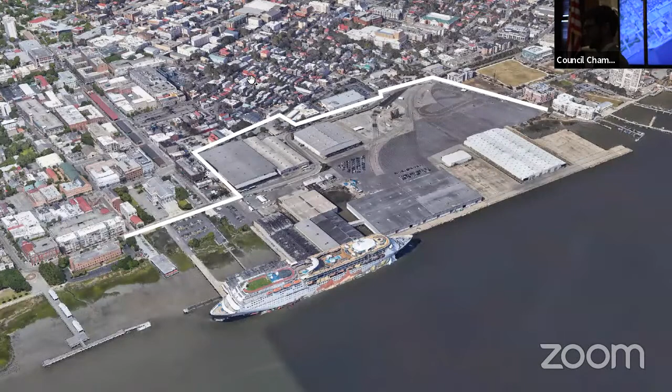If I could just get a cursor to click on that slide so I can control it, I think that will be good to go. You all know the site today. I assume everyone in this room knows where Union Pier is, so I think we're through that phase of the project and can move on.

So, the site today and the current master plan proposal. This is what we will be submitting to the technical review committee soon. This is the aerial rendering of what is proposed, and another view from the north shows the existing site and what is currently proposed.

The key thing I want to point out, as a refresher for those who may not have seen it, is that we have met with the community, we continue to meet with interest groups, and we continue to listen. We've made a major change in the overall master plan, eliminating buildings in the corridor where the rice mill is and replacing it with park space. There is now a grand mall that connects the rice mill to the waterfront, coming all the way through the site, connecting to the island park.

So just to refresh everyone's memory, this is our current operating master plan, the one we will be submitting to the technical review committee for consideration soon. In regards to this presentation, these are the four things we'll be talking about.

First and foremost, the planning process, how we have arrived at the current ideas; the intent of the transportation design; the program and its effects, meaning all the things proposed to be built at Union Pier and what they do; and fourth, a review of all the opportunities unlocked through this redevelopment. So with that said, let's jump right in.

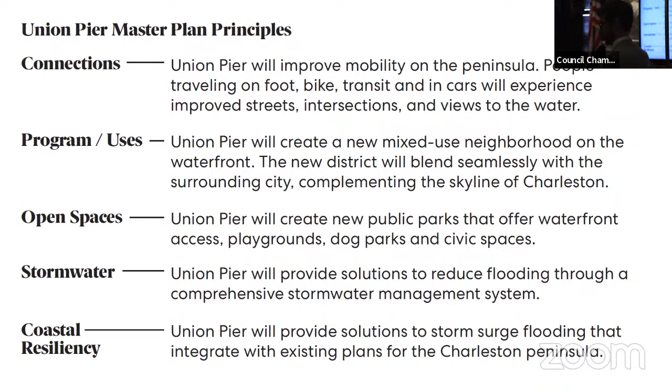The very top one is about connections, and that's really what we're here to discuss today: the potential for Union Pier to improve mobility on the peninsula, so that people traveling on foot, on bike, transit, and in cars will experience improved streets, intersections, and views to the water. That has been one of our goals from day one and continues to remain one of our goals, along with all the other things which we're not going to dig into.

This is the current proposed master plan from the air. This is the same thing you saw in the earlier watercolor, and you can notice the large green space in the middle around the rice mill, which is the most recent change. As you know, over the course of this presentation, some slides will be horizontal, some will be vertical. You can always use the Harris Teeter to orient yourself, or the Fleet Landing restaurant, or of course the Wharfside to the north.

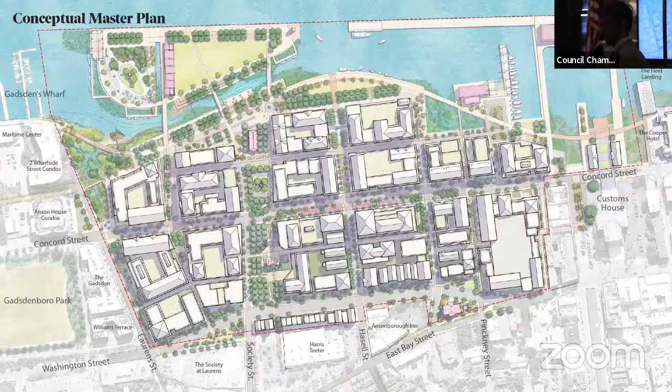In this master plan, what you see is a grid of streets. You see new development opportunities. You see the new waterfront rebuilt. And I want to point out a key point as we begin.

Inherent in the discussion of converting Union Pier from a port into something else is the idea that there must be agreement, concurrence around the goals of this conversion. That means agreement among many stakeholders and agencies, including the future owner, the current owner, local government, state government, the rail operator, other adjacent property owners, and coastal permitting agencies. This is a major project with many implications, and that interagency coordination is so important here.

In this map, you see the ownership of different streets in and around Union Pier. Obviously, they're different colors. The state owns many of the roadways, and the city owns many of the roadways as well. It's a fragmented ownership around the site.

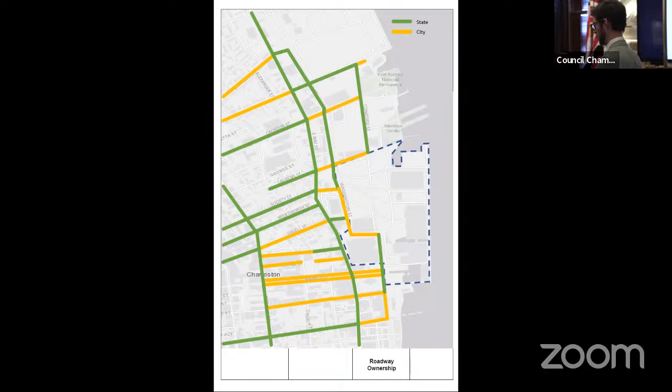Our request, what's going to be and has been written into the PUD, is a request for city ownership of all the streets on Union Pier. We believe the city is the best owner, and we will provide a revenue stream to maintain those streets. We want to move the ownership of these streets out of the state and into the city so that we can design them the way they should be designed.

So that's the planning process we've gone through, and that's the ownership scenario in terms of streets, city ownership, and public spaces too, which I didn't mention.

Now we'll talk about the intent of the transportation design. What do we intend to do? And I'm going to just grab my phone so I can watch our time. I'm watching, I got it.

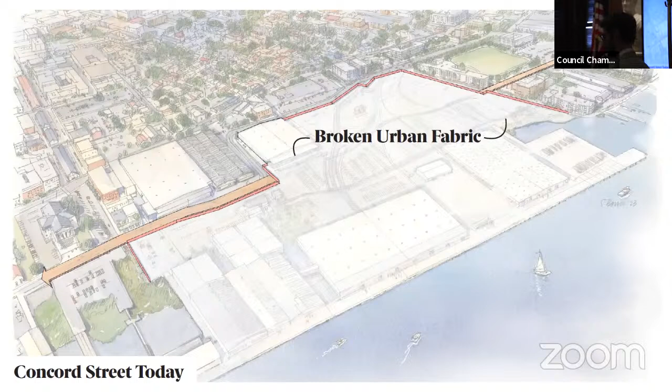This broken urban fabric that's illustrated here is the thing that Union Pier can solve. It can provide opportunities to improve that broken urban fabric and provide for new connections. This is the plan that realizes that, but this is what it looks like from an analytical standpoint. I'm going to return to this diagram because it's the most important aspect of my presentation today, and Jennifer's as well.

Unlike many other developments built or proposed on the peninsula, Union Pier has the ability to add new routes to the network that will help distribute traffic. It will improve intersections all at its perimeter. Consider recent real estate developments downtown that add no new streets, don't improve intersections, and have no mobility enhancements, just loading the grid with more. Union Pier has the chance to expand the grid for people in cars, on bikes, on foot, and in transit. That is the power of this proposal, but it can only be realized if this redevelopment takes place.

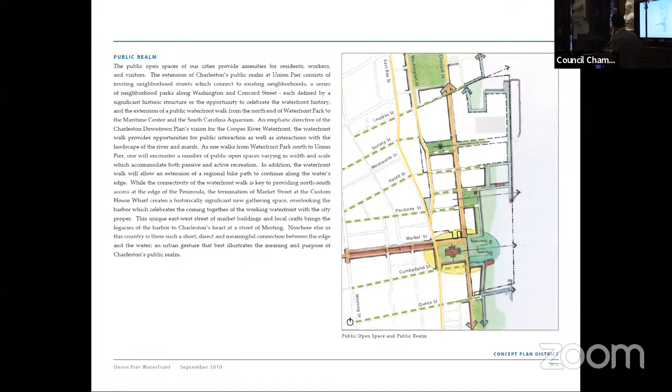These ideas go way back. I've been told there are even plans from the 70s that talk about improving the Washington East Bay corridor, though I haven't seen this. This, of course, is in the Calhoun Street plan by Chan Krieger done around 2005 or 2006. The Century 5 plan includes the 2010 plan for the reuse of Union Pier, even back to the 1996 plan for Union Pier, all suggesting changes to the corridors of East Bay and Washington. They keep coming back because it's a good idea, and we continue to study it. We think it's something that needs to be pursued and done.

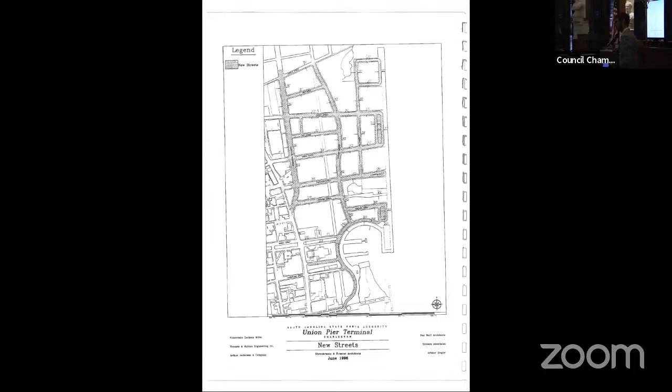This is how this can work. We're going to show you the design options we've looked at, and the one we think is most feasible.

So again, we're oriented 90 degrees here. You can see the East Bay corridor snaking its way through. If you live in Charleston and you've driven on East Bay Street, you know the segment from Calhoun to Market is substandard in many ways. The lanes are too narrow, the geometries are irregular, there's no space for bikes, the sidewalks are too narrow, the intersections are challenging. It's just difficult to navigate.

Our goal is to create a slow speed, high volume network on and off site, with improved efficiency that can help move everyone through the grid. One way to achieve that is by increasing the facilities on Washington Street and enhancing it so that Washington and East Bay begin to function as a coordinated pair. That's what's been described in all of these subsequent plans for maybe 50 years, and that's what we've looked at.

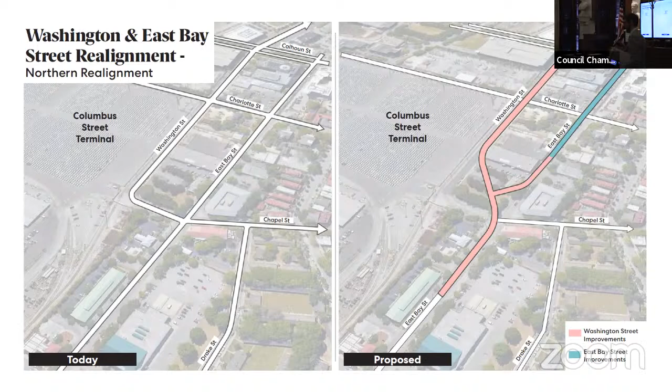That's right. There's the cut through the gas station, which I'm sure the bank and the gas station just love, the fact that there's that little road there.

This can be enhanced, this can be improved. But this northern intersection can only happen if the southern part happens. Why is the southern intersection only possible with the redevelopment of Union Pier? The answer is that the diversion of Washington Street, and I'll show you some drawings on that in just a second, goes through the warehouses currently on the Union Pier site. So this network arrangement only comes into play when Union Pier itself converts from a port to another use — the warehouses have to be demolished. That's probably why this has never been fully realized.

So with that said, these are the alternatives we've looked at. The historical proposal puts 4 lanes on Washington and 2 on East Bay. As we've studied this further, we believe this has significant right-of-way width constraints — there's not enough street width to get everything through. So this option is constrained in a way that makes it significantly less feasible than this design, which is a 3 and 3. What this does is shift volume off of East Bay, away from Ansonborough and onto Washington, accomplishing the network goal of the original proposal from 40 years ago.

But it does it in a way that is the most feasible, because you don't run up against roads that are too narrow. So this can work, we believe. This is our recommended and preferred option, simply because we believe it's the most feasible.

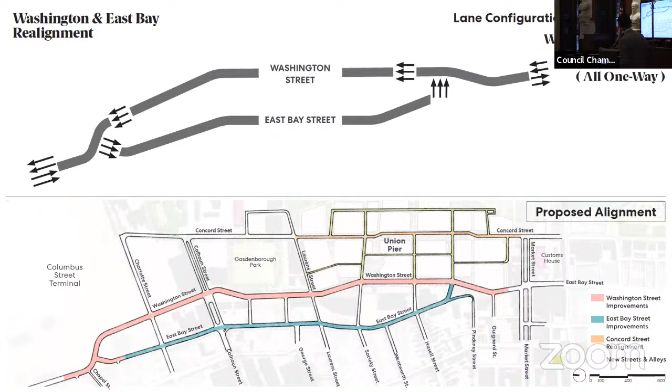So what do those details look like and how do you accomplish an improvement of these networks over time? I don't know, Jennifer, do you want to go through these or do you want me to just roll through them? What do you prefer? Okay, if I say something wrong, yell at me. Okay, I'm just going to read from the slides, which seems like the easiest thing.

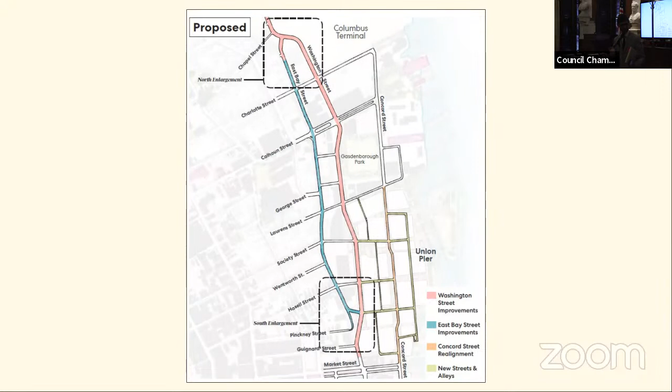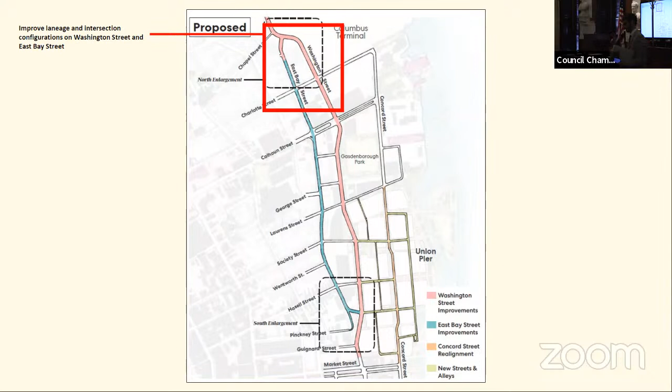So how do we do this? First thing is to improve the laneage and intersection configurations on Washington and East Bay. The second thing is to improve Washington at Calhoun, that intersection, and to shift traffic flow to Washington. The Washington-Calhoun left-hand movement northbound, as you all know, is a challenging one. This network design can help to change that and improve it if it's done the right way.

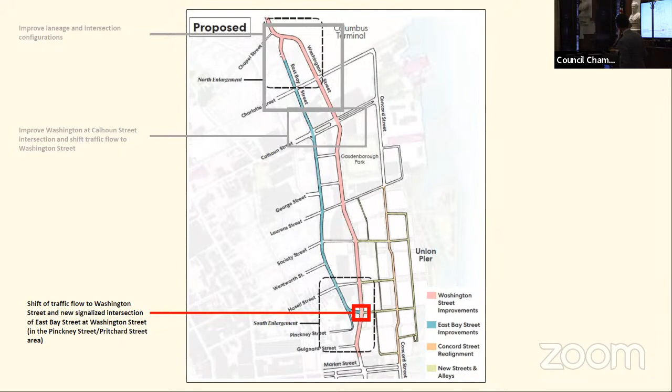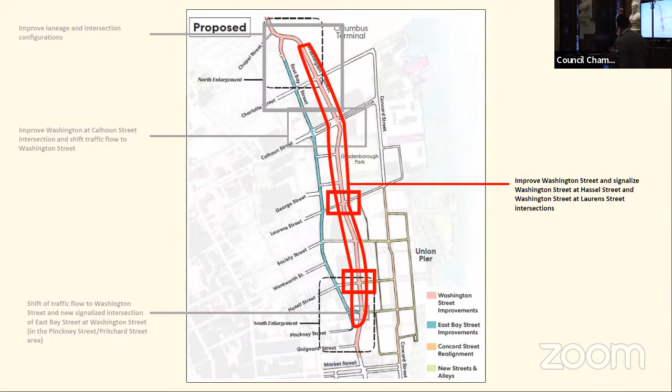At the southern end of the site, again at Union Pier, shift traffic flow to Washington with a new signalized intersection of East Bay at Washington in the Pinckney-Pritchard Street area. Then all along the Washington Street corridor, improve the street, signalize it at Hassel and Washington at Laurens. And then improve, finally, the intersection all the way to the north at Charlotte.

This is at the aquarium in Charlotte Park. There's just a turn in the street there. That intersection has some visibility challenges, and Jennifer could elaborate on those. That also needs improvement. These are the offsite improvements that need to occur to realize this vision that the city has had in so many plans for so many years. This again requires interagency coordination and a commitment, but it's not possible without Union Pier's property.

Come on up, come on up.

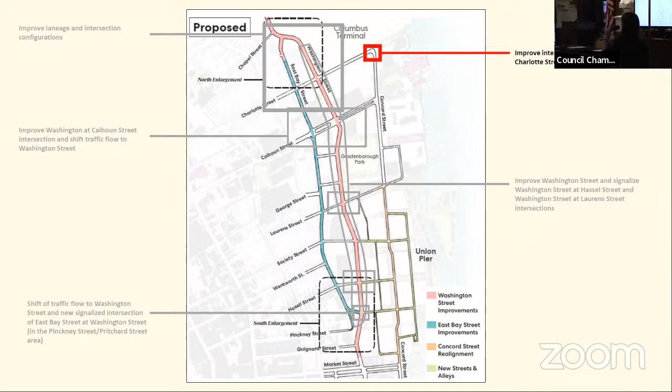Just as a reminder, we're looking at the vehicular improvements, like what do we need to do to get the cars to where they need to be? There's a whole set of pedestrian and bicycle improvements and transit improvements that are on. So just remember, Jake's kind of stepping through this way, but these are the ones that we're working on, top to bottom.

If anybody's been to the Charlotte or Concord at Charlotte intersection, you know that's just not a real intersection today, it's kind of a turn. There will be increased volume even with the current plans for that section of Concord. So just get that cleaned up and make it more efficient. We're looking for how to not only help with the lane widths and make the streets a little bit bigger, but be able to handle more capacity and efficiency, and really get the most we can out of the lanes that we have and the intersections.

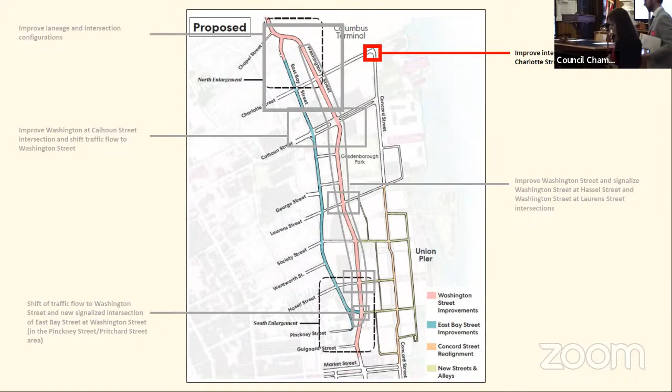So I'll move along, we'll come back. Keep going. What could this look like? These are some sketches that show how these concepts may work on the southern end.

East Bay and Pinckney Street, so that's correct. This is East Bay Pinckney. Market Street in this image is behind you, it's to your back. So in the future, Washington Street diverges and it goes again through the warehouses that currently exist.

Can I ask you a question about that? Can you go back to that picture? Is the effective zero lot line of the Union Pier PUD and development Washington Street? Is that the zero lot line?

Help me understand what you mean by the zero lot—the edge of the distinction between Union Pier on and Union Pier off? That's correct. To the right, on the other side of the purple line, that's Union Pier. And today, where the van is parked, that's Union Pier—that's on port property.

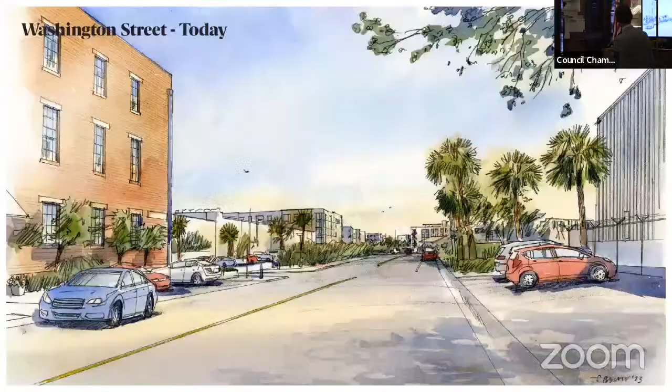So yes, that's correct. And then when you're on Washington Street, what does Washington Street look like? This is today's Washington Street, with the Ansonborough Inn on the left. What's envisioned is a beautiful street in keeping with Charleston's character—3-story buildings, row house type design on the left. This kind of reconfiguration is what we think can be enabled.

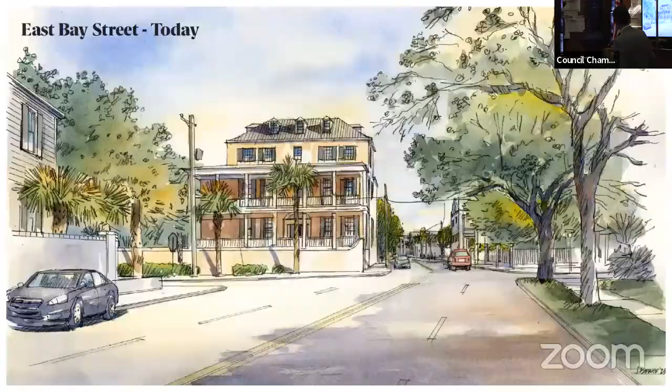What does East Bay Street look like? By shifting volume away—and again, we have to make sure we've proved it out, I've got to make sure it works—3 lanes here and bike facilities on East Bay, because this segment of East Bay does lose a lane in their current preferred option. So you're losing one vehicular lane through the entire corridor.

Next, the cycling network. First and foremost, we need a meeting with my friend Mrs. Zimmerman and Charleston Moves. I want you to know we've read every letter you've written. We understand there are needs that can be met here, and we want to get together with you as soon as we can. After the meeting, let's talk, because it's important we understand all of your viewpoints and perspectives. I also want to say, as a lifelong cyclist myself, you all know that's a cause we're dedicated to. I want to walk you through our current thinking.

On Union Pier, the proposal is for narrow, slow speed streets made for the integration of walking, cycling, and vehicles all at once. We are not proposing high speed streets that need separated, dedicated infrastructure. That's not in the design proposal here, with the exception of course of East Bay Street.

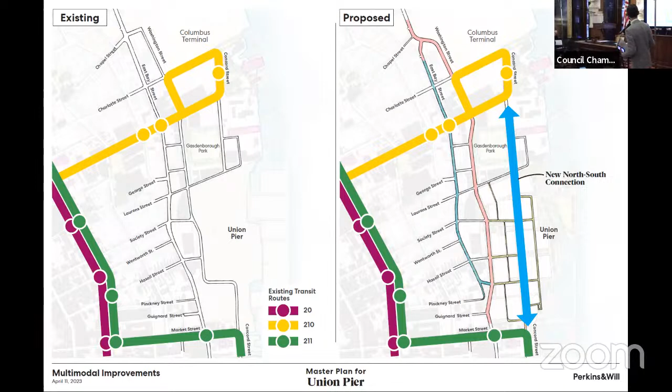And the final thing, the whole grid built out, is the pedestrian network. This is, in many ways, for me at least, the most compelling aspect of Union Pier.

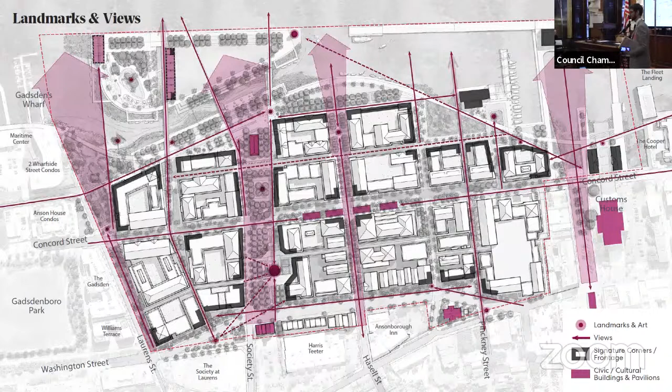We really think the pedestrian opportunities here are incredible. And I'll conclude on these slides. I've just got a few and then I'll conclude.

Creating the link of the public pedestrian promenade all the way around the peninsula is the crown jewel of this project. We believe it will be a major enhancement, not just because of its resiliency qualities, but because it is a great place to walk and will open the harbor to the public for the first time ever, interconnecting a beautiful series of spaces.

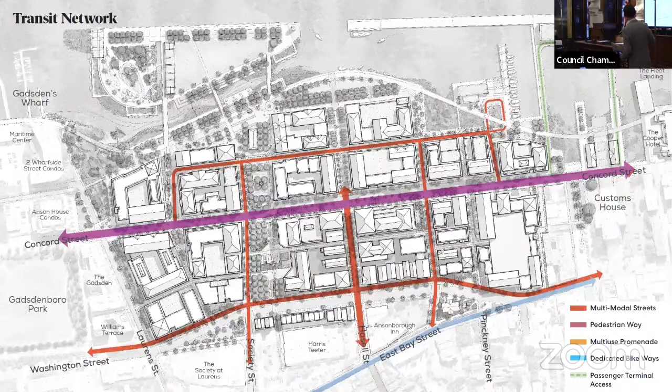So again, an automotive network, high efficiency, preserving existing level of service on the whole network by creating new connections. A cycling network that has potential to create a bicycle route all the way up and down East Bay Street, Market to Chapel. A transit network that opens up new stops along Concord Street, serving port of call passengers, serving potential passengers from the ferry service, and serving everyone in Charleston who wants to move around on transit. And a pedestrian network that expands greatly the pedestrian assets of downtown by linking the waterfront to the north and south.

And this is the vision that we believe can accomplish that. So with that said, I'll stop, before I relinquish the mic to the port team and the design team.

Have I missed anything? Anything else you want to add? Get it on the record? Nothing else? Okay, thank you, Mr. Chairman. Well, thank you very much. I see a question.

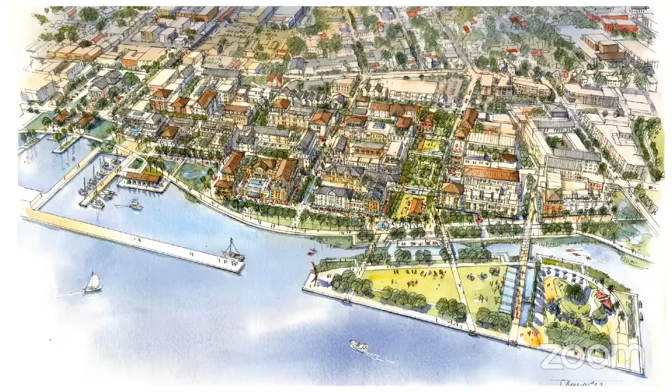Yeah, no, thank you, Mr. Chairman, and thank you, Jacob and team for that. Greatly appreciated, and I appreciate you reaching out to Charleston Moves after this, because I think they have an important advocacy role to play.

But I had a question, and it may be more towards Chairman Seekings. He and I have worked on stoplights a lot here in the city, and know that our friends at the county and the DOT are not always as receptive. I agree with those locations, but I wanted to see what we thought the time horizon was for our friends at the state and the county to come on board with this plan, if it's what we choose to go forward with.

That's a good question, I had the same one. We'll hand it to Jacob. I think the question is, when are you going to sit down with the county and the DOT and talk about the off-site changes and improvements, which you don't control, as opposed to the on-site ones? Great question. We were just about to finalize our traffic study, and it would have been premature to speculate. Now we think we're at a point where we can begin doing that.

Yeah, because off-site, particularly the East Bay, Washington Street couplet, and whatever you do with Concord Street, you're going to need the DOT. Right, that's 100%. Even if we take back all the parts of those streets, it's DOT on the front end.

Okay, Councilmember Brady, any follow-up? Nope, that's what I was looking for. Great, thank you. Mr. Mayor?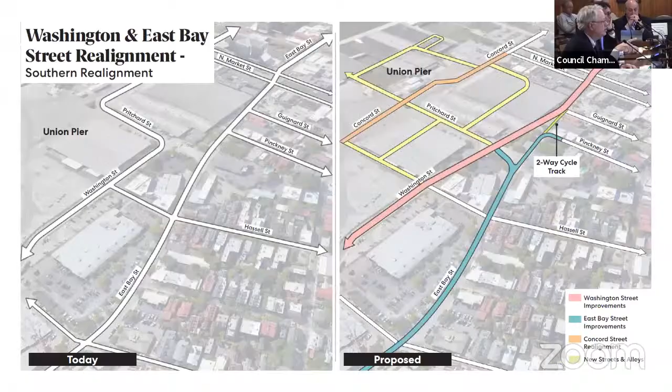I just wanted to point out the beautiful barbed wire fence that was right there. And then we've had a lot of discussion about green space. I think that's the only tree within Union Pier right there in the right of way.

Just for everybody's edification, it happens that I worked for the city during the late 90s. Barbara might remember this, but the reason they closed Concord Street was that even though the city was encouraging the port to do this redevelopment of the terminal, BMW was really ramping up production, they improved the rail access to the site, and Concord Street created conflict with the arrival of the cars that were going to be shipped out through Union Pier. That's why Concord Street got closed back then.

Of course, we don't really use the rail much anymore ever since the cruise ships went in, so it kind of seems like, well, why did we ever close the street? But anyway, there was a good reason at the time.

Speaking of the pedestrian waterfront walkway, this might be something we need to all follow up on. Have y'all talked yet with Wharfside and with Fleet Landing? They seem to be the two property owners we need to get a right of way or permission from in order to make that possible on the southern and northern ends. Once you get past Wharfside, you're at the Maritime Center and we're good to the aquarium. On the south side, we're good at the Cooper Hotel, but not across Fleet Landing. So we can come back to that another time.

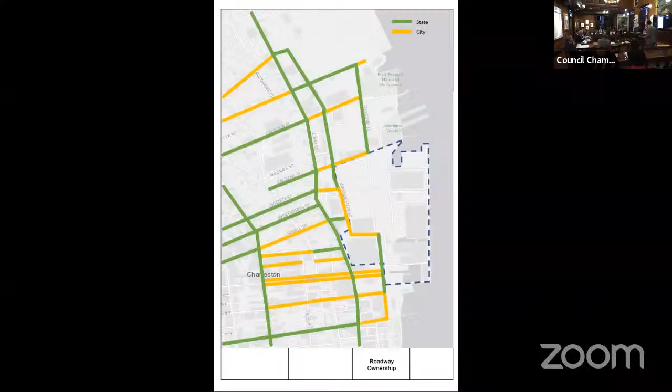The intersection rating, this example came up, and I guess there are two points. One, if you turn to one of those maps where you showed the vehicular traffic - it occurred to me on the secondary streets, particularly Pinckney and whatever little side street, Pritchard is the one just north of Pinckney, and there's even a north-south secondary street in there. They don't line up at the intersection.

Everything I've learned about this business - I'm not a traffic engineer, but the DOT tells us always try to line your streets up, you get better performance out of them. Case in point is over in Avondale. We want to realign Nicholson Street, and the county did a study saying if you leave the intersection as is, in 20 years it's going to be rated an F or an E, a failure. But if you do the alignment right, it makes it an A. A huge difference just from making a simple alignment of the street.

So I was curious if Jennifer is going to have any kind of intersection analysis - what would the rating for East Bay and Calhoun Street be 20 years from now versus if you do all this? That's another kind of follow-up thing. And then Guignard Street didn't really make it across East Bay. I know you got that big development block there, but I would still question how you're going to access and service that block without having an alleyway or a Guignard Street going through the middle of it. I think that's all on my list for right now.

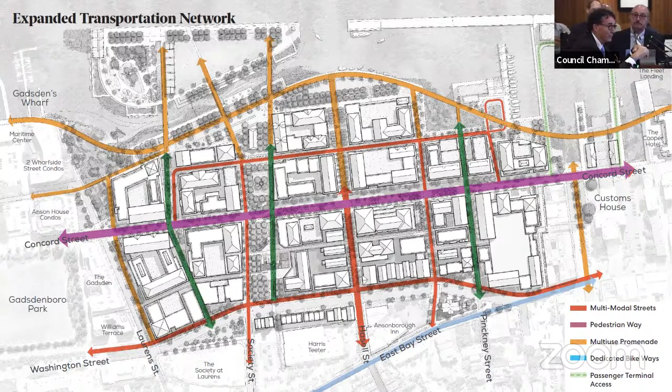Great question. So one of the things we've been doing is studying these alternatives and seeing what can work, and we have one we think is most feasible right now. We're also coming forth with a traffic study, so we'll have real data to begin discussions. But the most important thing is that the city, through the PUD, decides on the plan the city wants to pursue. It's an endorsement of a plan for the corridor. At the PUD level, what we'd typically do, but we're going to exceed that in this case, is say this is the concept for offsite improvement.

But in this case, we're going to go a little bit further. At the concept plan level, when we get really down to the details of engineering, that's when we would like to have the corridor engineered out. But with that said, we think select an alternative, look at the details of that alternative, discuss with the other agencies.

Most importantly, have the city endorse one of those alternatives as a part of the PUD. So let me follow up on that. A PUD is what it is. It's a creature of both South Carolina and city law. There are the confines of the PUD and there's the effects inside it and outside, right? What tools do we have, the city or collectively together, to make outside of the PUD improvements happen and be tied in to this PUD?

That's a great question. It's very common in many PUDs to speak to the nature of offsite improvements. Long Savannah speaks to the Glen McConnell expansion. The list goes on. Almost every PUD has those provisions within it. And what we would do is with the land use attorneys, welcome a discussion about exactly how we accomplish those things through all those mechanisms. And of course, there's the PUD itself. There's also the mechanisms of the TIF, which can tie specific funds to certain improvements. We have a lot of tools in the kit, and we look forward to a discussion as we go forward.

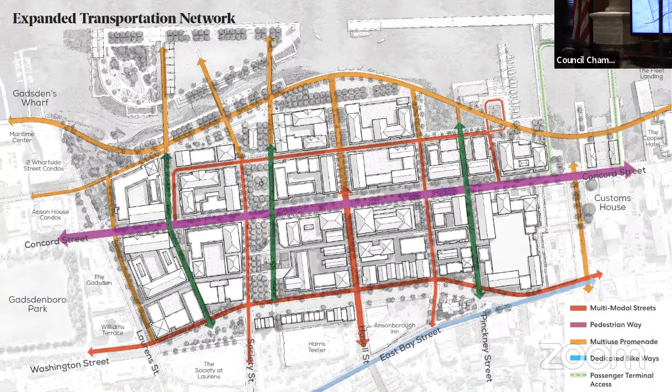Thank you all for being here. Unless there's any real pressing questions for any member of the committee, I'm going to end this portion of our program by saying this: this is incredibly interesting and informative. More to come, right? Would love to have you back at your convenience and ours, but sooner rather than later, if you all don't mind, and if you don't mind keeping us informed. And I would ask that to the extent that you all are meeting and speaking with the DOT, you just let us know how that goes and perhaps include Mr. Somerville or some of his staff as those conversations go forward. Okay, any other questions for any member of the committee?

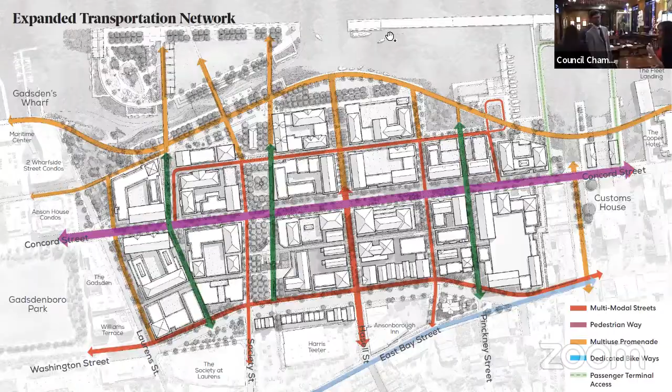Also, will you share this presentation with us, please? Great, thank you. Any other questions for any other member of the committee? With that, I'm going to move on to the next item on our agenda, which is the parking meter contract approval with Cale America Inc., doing business as Flowbird. Who's going to handle this?

Ms. Shear, it's you, Chairman? So I'm here to report some good news. We have finalized our contract for- come right up to the mic. Okay, sorry. All right, well, I do have some good news to report. We have finalized the contract for our updated parking meters.

This is with Cale America doing business as Flowbird. This was an RFP that closed end of last year. I believe several of y'all were on the selection committee and awarded the contract to Flowbird, Cale America. We have finalized the contract. It'll be for $800,000 for a term of 3 years with 3 one-year extensions. I believe that the team has already been down to work with the city of Charleston to identify our needs. I'm not sure if those have been finalized yet, but it does look like it'll be over 1,100 new parking meters.

No action needs to be taken on this contract. It went through bids and purchases, so this will appear on Ways and Means. This was just for information and to answer any questions.

Okay, any member of the committee have any questions, or Mr. Somerville, do you have any follow-up? Anything you want to add?

No, sir. I guess I just want to let the committee know, we started this back in October of last year, and in December is when we made the selection of Flowbird. We went through the negotiations of this and we're ready to move forward. Flowbird are the new meters. We plan on having single space, double space pay stations. We'll have the parking apps and smart card, credit card options. So we're pretty excited, and once we get this contract signed we're ready to move forward.